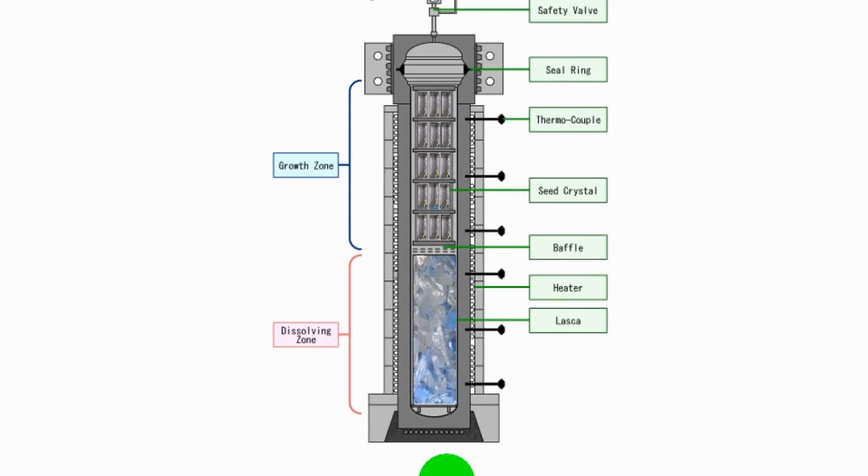We have a steel cylinder called an autoclave. It's also called a bomb because of its predilection to explode under certain circumstances. The autoclave is divided into two sections, the dissolving zone and the growth zone.

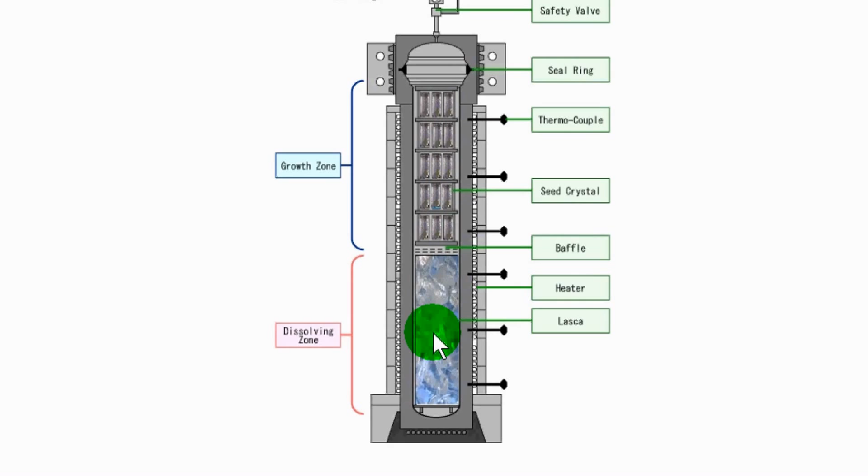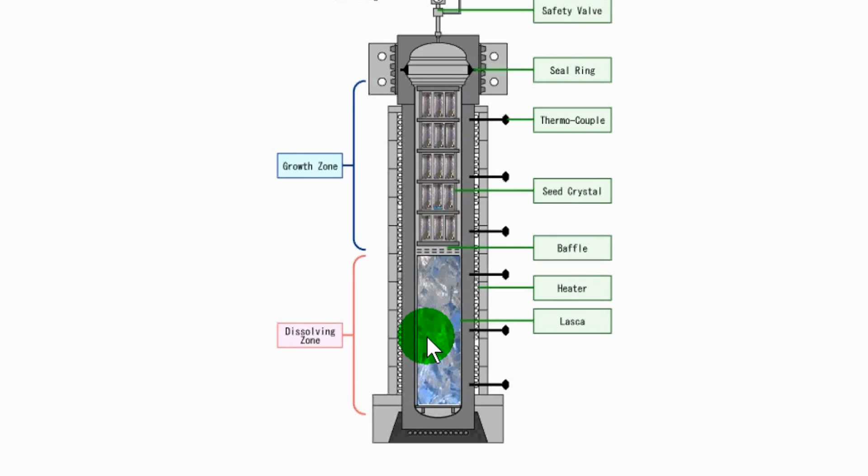In the dissolving zone, we have a material called lasca, and lasca is basically crushed quartz crystal, natural many times, or glass, high silica glass, or it can also be synthetic quartz crystal that, for whatever reason, didn't meet the growth criteria. So this is your area where the feedstock, if you will, is kept.

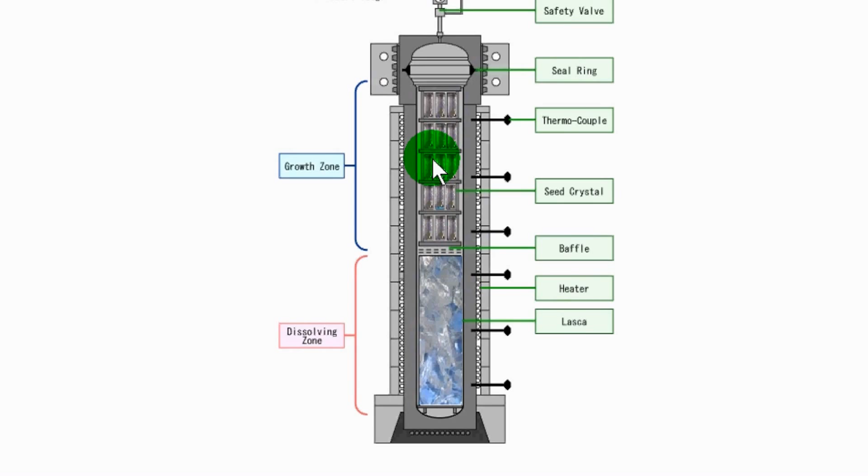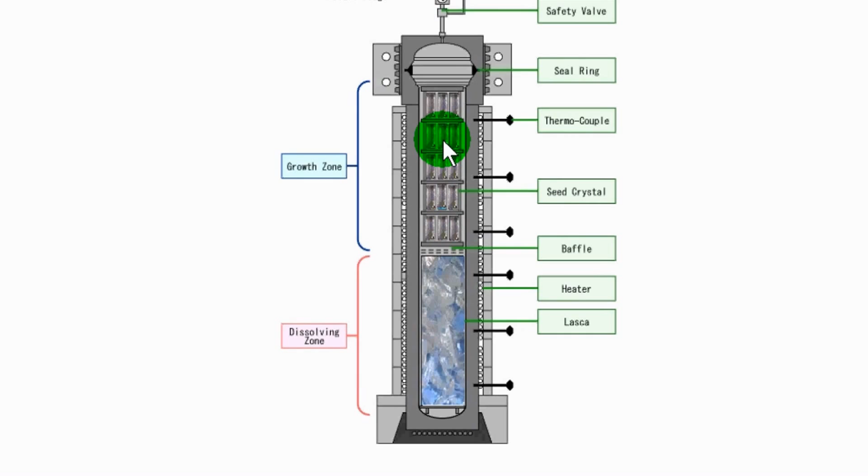Up in this area are where the seed crystals are mounted. The seed crystals are basically very thin plates of quartz, around 2 millimeters thick, upon which the quartz crystals actually grow. Now, it is the shape and orientation of these seed crystals relative to the quartz crystal growth axis that determines what kind of shaped crystal you're going to get, which is why we saw some of those strange shapes that we're going to talk about.

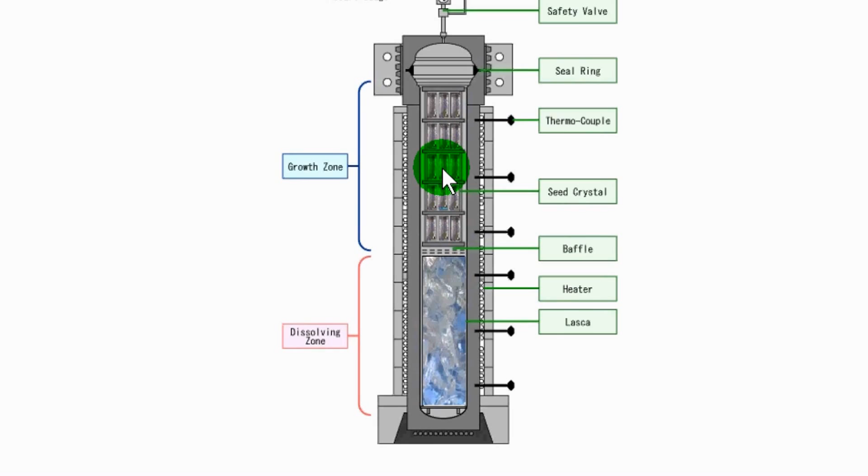But anyway, the whole process is separated by this plate called a baffle, and the baffle actually is what restricts the flow of liquid and also shapes the convective flow between the nutrient or dissolving zone and the growth zone.

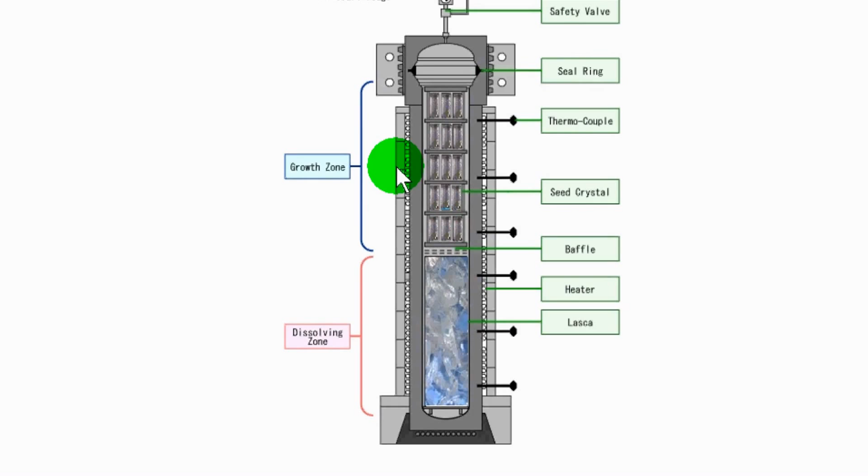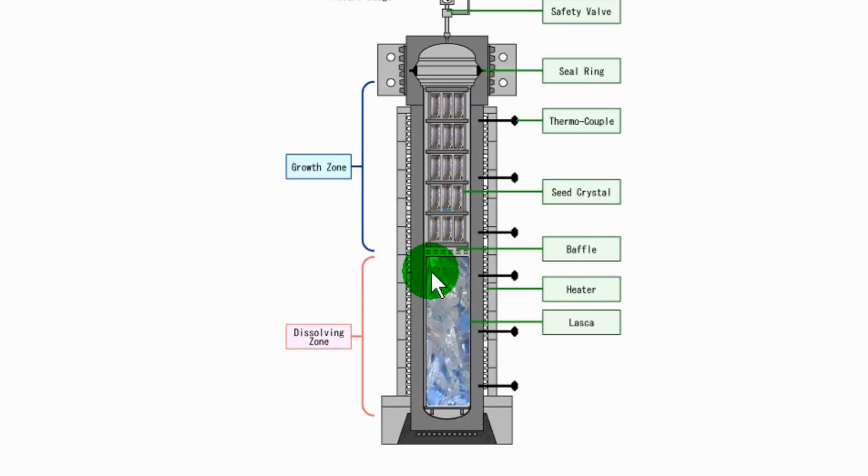So the whole thing is heated with an external heater, usually a resistance heater. What happens is the water quickly becomes very hot. The temperature is raised up to 400 degrees centigrade. And at this temperature and this pressure, and with the proper mineralizing agent, this lasca starts to dissolve and form a saturated solution.

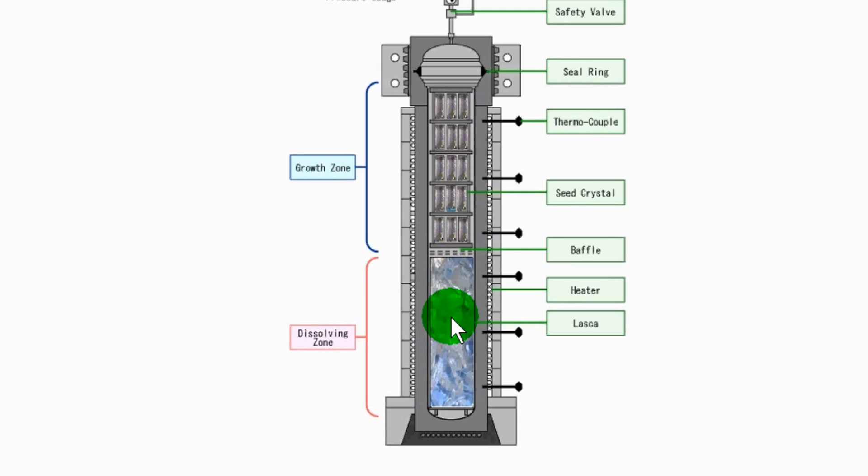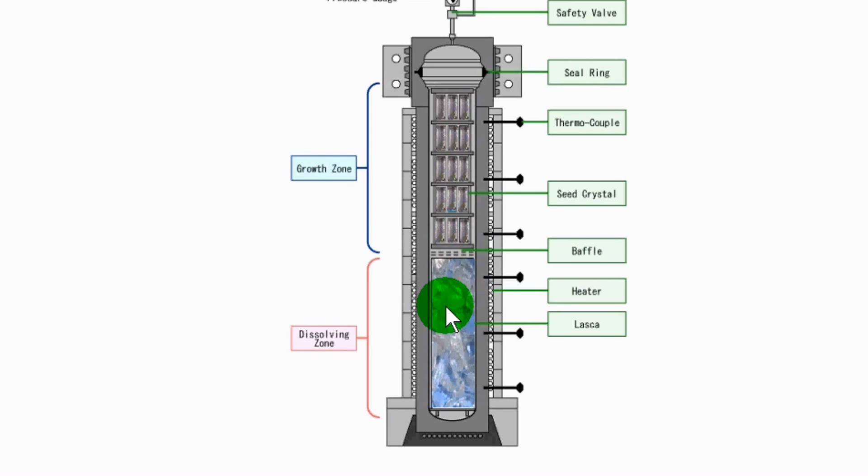Now, up here in the growth zone, the temperature is kept about 50 degrees lower than it is in the dissolving zone. So what happens is when the liquid rises here due to convection, you'll see that the actual solution can no longer hold all of the silica that was dissolved in it, and it begins to deposit it on these quartz crystals.

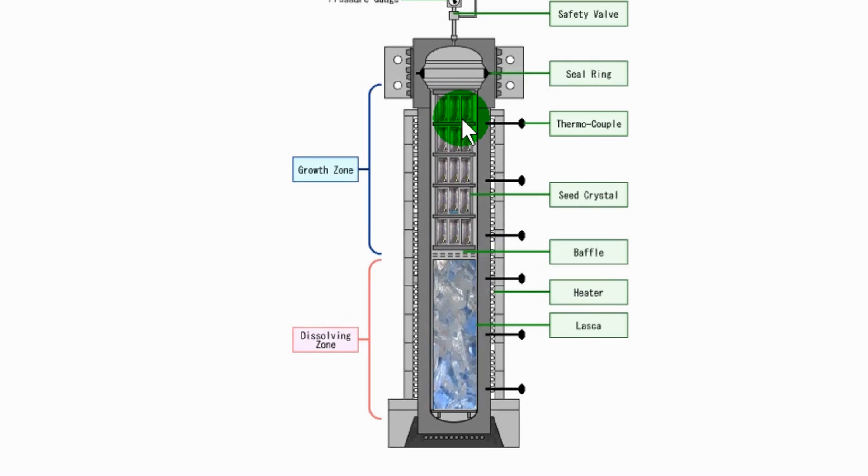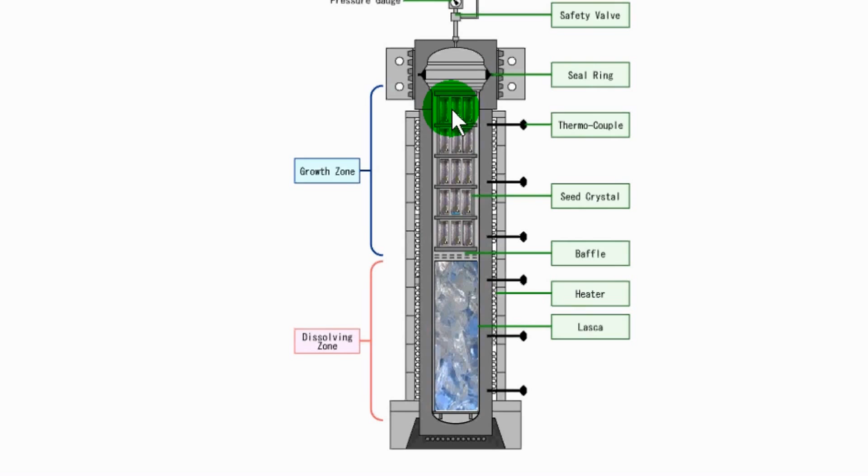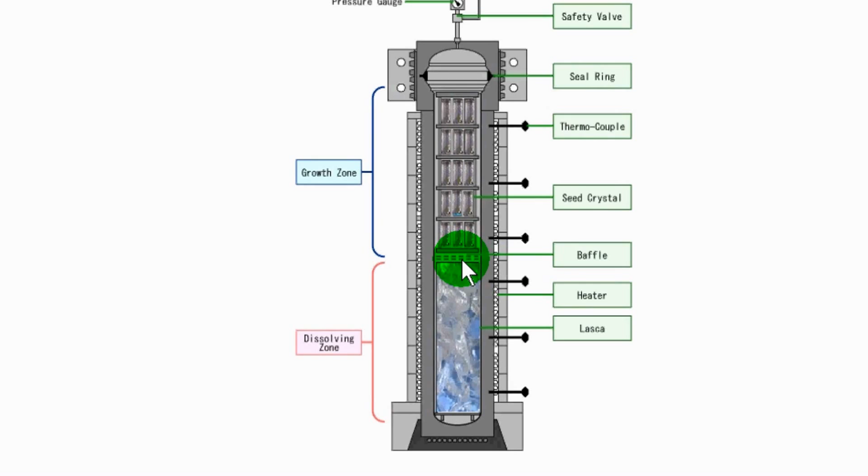So the whole process is contained inside of this pressure chamber, and the dissolution and growth may take 2, 3, 4 months, even a year.

At the very top here, by the way, is the special sealing ring that prevents the whole thing from exploding. This is a Bridgman seal, considered something of a revolution because it allows the seal to properly absorb the pressure without any one part of it becoming overstressed.

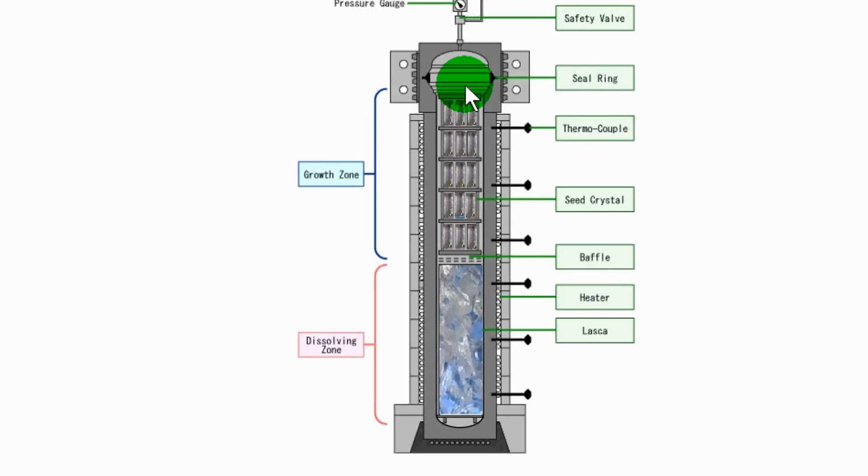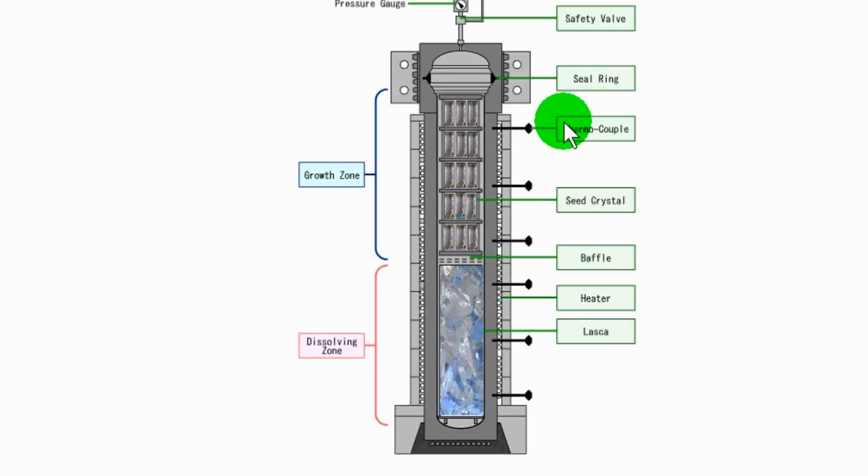So it's sealed. There's a thermocouple that actually reads the temperature inside the top of the chamber to determine that there is the proper temperature separation.

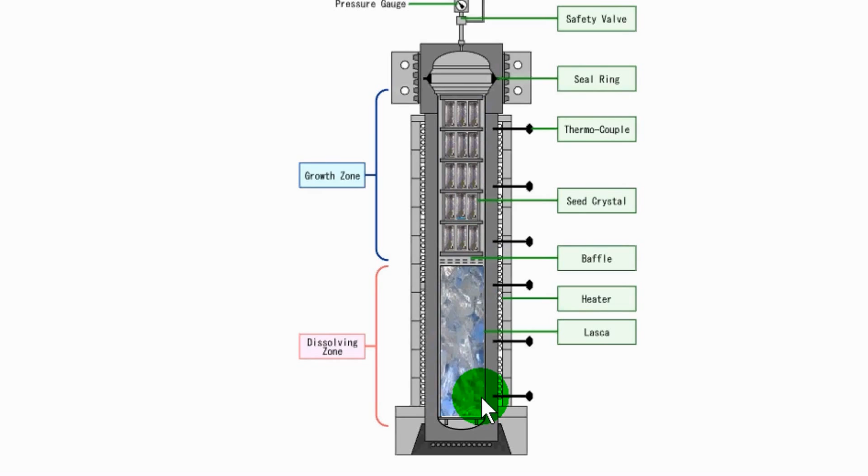And of course, there's a safety valve in case the pressure, for whatever reason, was to rise out of control. If this temperature down here, for some reason, became too hot, rather than blowing the whole assembly apart, the pressure relief valve will release the pressure.

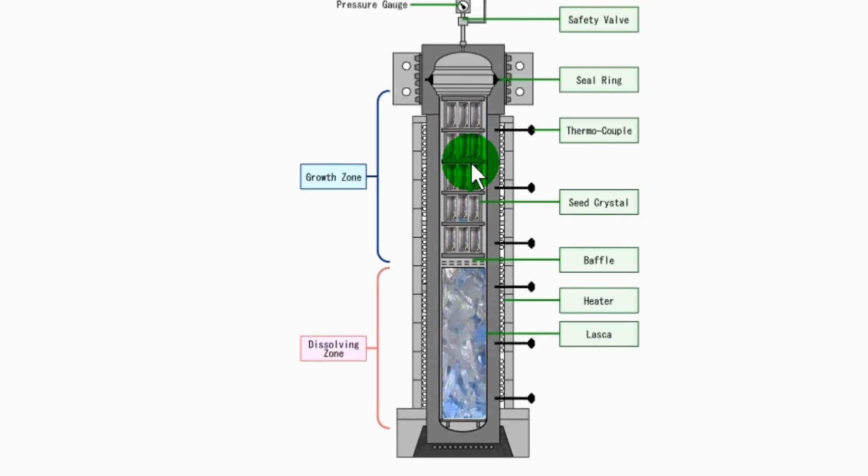So, anyway, the big issue with this process is that the whole thing is sealed and you can't see what's going on. So you really don't know whether or not you've had a successful growth run until after you cool down the entire chamber and then pop the seal and remove the assembly of seed crystals. So that's how the process basically works.

And it's what the Russians used. The sizes of these autoclaves have grown over the years. The largest one right now, I think, is a meter across and maybe 15 meters high.

So a really huge assembly. Some of these can now grow up to 4,000 kilograms of crystals in one run. So impressive.

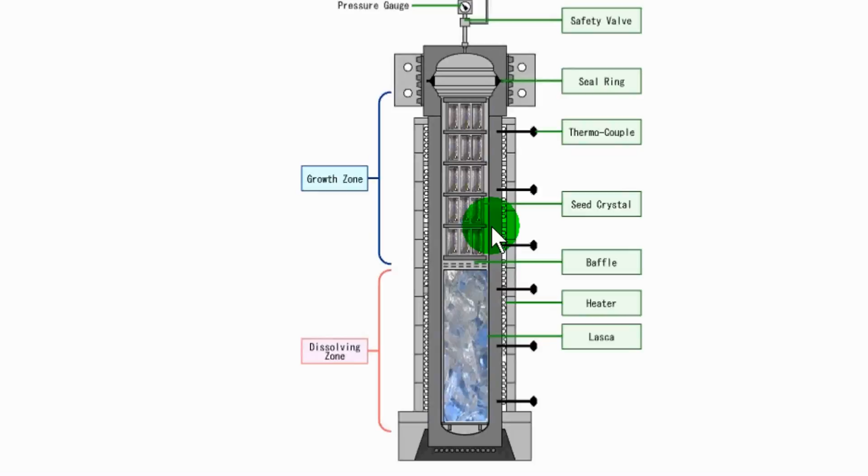And here are some pictures that were taken inside the growth facility. You can see the huge size of the autoclaves.

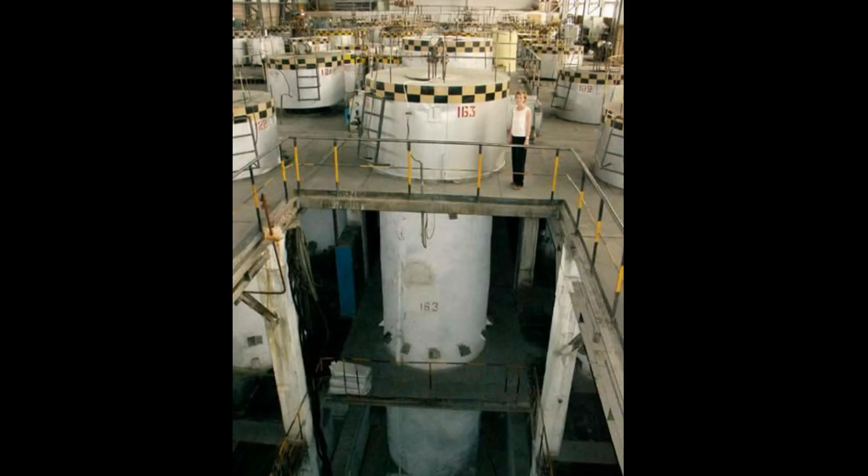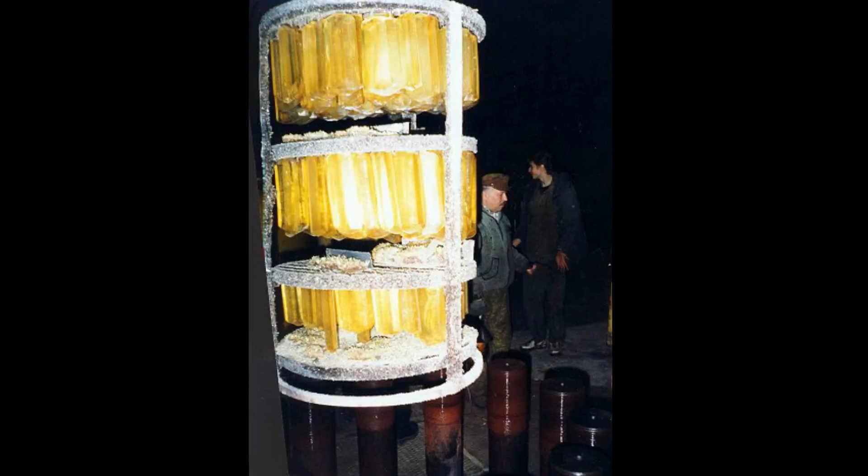Big tree of crystals, probably 1,000 kilograms, or another tree of crystals. I think those are citrine. And a final look at some crystals.

So, here we have an example of what the Russians were trying to synthesize. This is a standard quartz crystal. Actually, it's a doubly terminated quartz crystal, which in and of itself makes it virtually useless for electronics.

It's a beautiful piece, unique and inexplicable. But this is not what the Russians were attempting when they started their projects.

This crystal is an incredibly clear, pure, synthetic quartz crystal. What's very unusual about the Russian quartz crystals was the fact that they chose to grow them so that they resembled natural quartz crystals. That is to say, they allowed the development of all of the rhombohedral faces. You can see here, this looks very much like a Herkimer diamond in terms of its completeness. Doubly terminated.

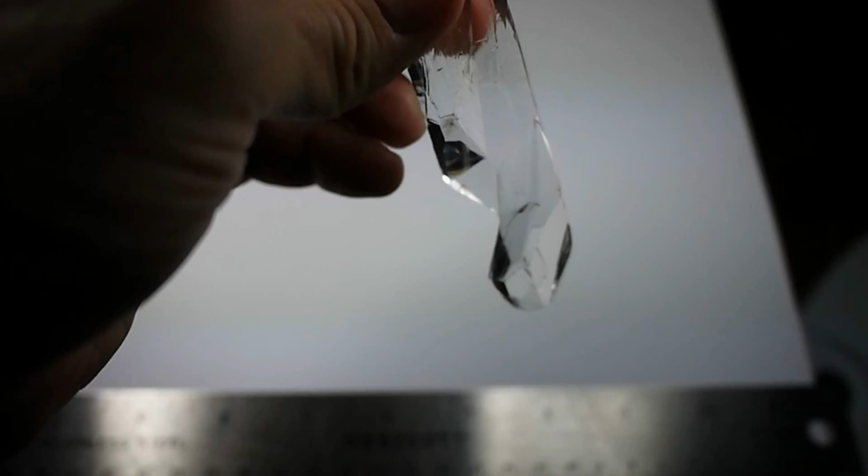Here's an interesting one. Everybody makes mistakes, and the world of crystal growing is no exception. This crystal was grown and for whatever reason was a freak, kind of strange looking. I often think of these as similar to those double struck stamps or coins that you see. It just didn't come out the way they planned, and because the autoclaves where these are grown are sealed and have no viewport, you really don't know you're going to get a screw up like this until after the chamber is opened, after several months of growing.

Here's another large trigonal shaped green crystal. The green is caused by a valence of iron. I believe this one is Fe2, for those of you who are scientifically inclined. Again, you can see the seed crystal, and some of this is making its way into the gemstone world, but these particular crystals, because they were grown during the old Soviet Union weapons era, are quite unique.

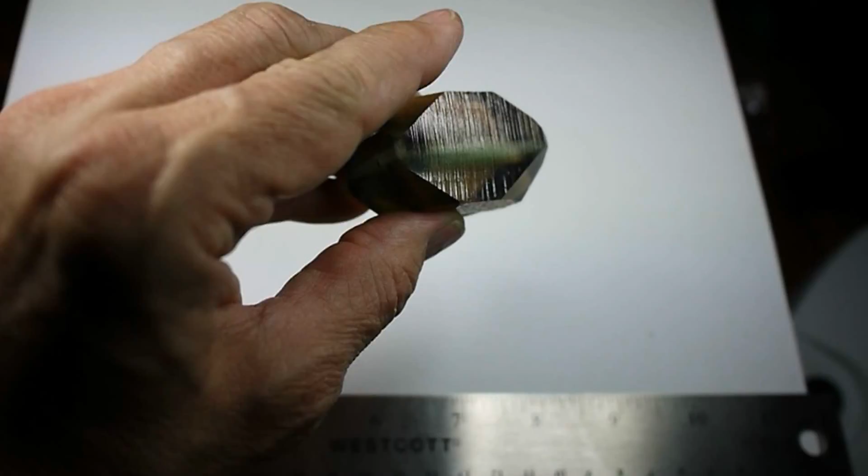Now here's a strange piece. This is actually dual color—you've got the green in the middle, and then it starts to turn to a kind of brown color. These crystals grew this way because the initial growth had some of the steel autoclave dissolve into the silica growth solution, producing the green, but that settles out pretty quick. Then the iron oxide placed in the solution took over, and you get the brown color.

I've been saving some of these incredible pieces. This is one of the clear crystals, and it's absolutely magnificent—so clear and so perfect. Optical clear quartz like this would be used in prisms for laser assembly, might be used in lenses for spy telescopes, but just an incredibly beautiful piece. You can see the platinum wire embedded really clearly, which held the seed in suspension while it was inside the autoclave.